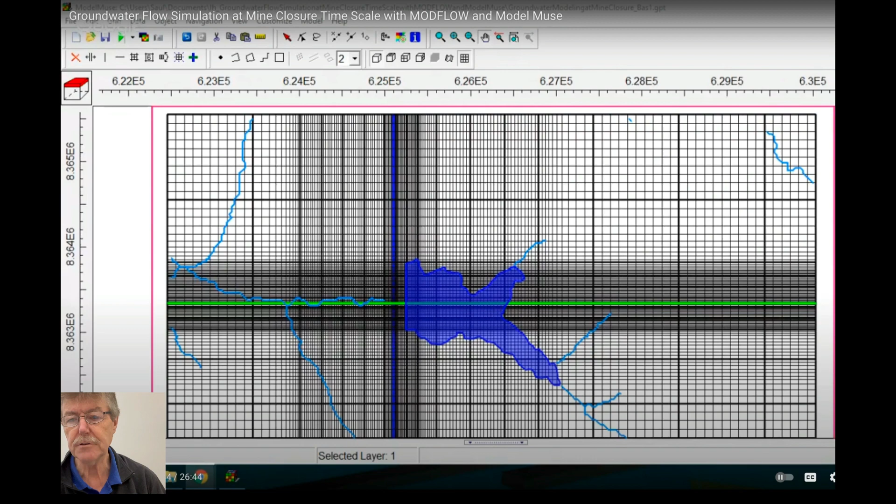Then we can solve them through a little shenanigans that we tried last time, and so maybe we can look at that. So that's where we'll follow on from today. So what we'll do today, if I bring up the things we had - did I open it already? I think I got to where we were. Well, this is what we'll do today.

These are the things we'll chat about - recap first, but then we'll just finish off what we talked about in terms of flow in porous media. We'll see that we can solve lots of porous medium flows and external flows, flows around wings, by using something called stream potentials.

And then we will look at conservation of momentum equations, where our forces are equal to velocity times this equation here, to solve for open flow problems.

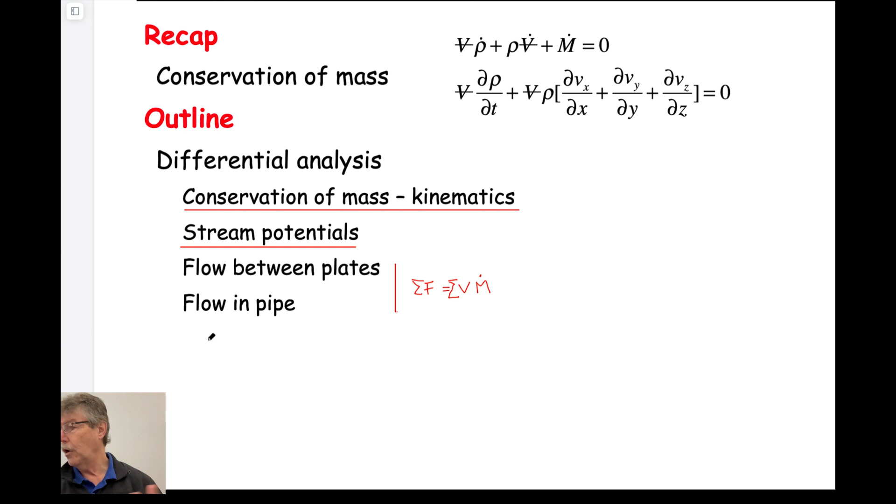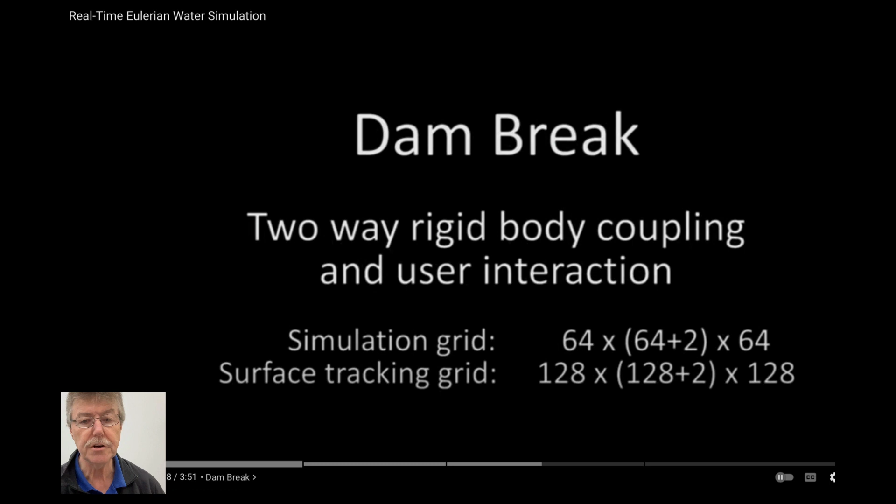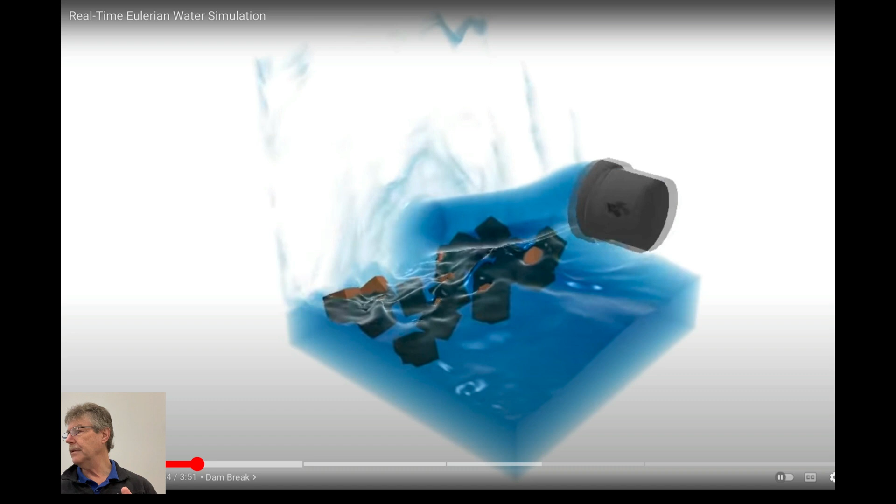We didn't really look at this morning, but we make the distinction between flow within porous media and flows which are actually external. Instead of flowing within porous media, these are free flows - like water sloshing around in a bucket with no porous medium in the interim. For that, we can't use Darcy's law to apply the frictional losses, so you have to do it in a different way. We'll look very briefly at that, just because it's an important thing in solving flows like this, not that we'll talk about actually solving them.

So that's our plan. Let's go back to maybe what we had last time.

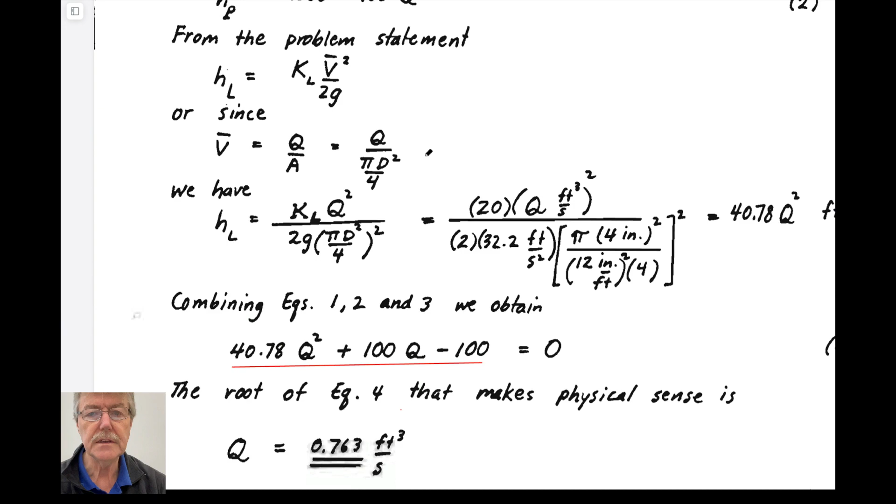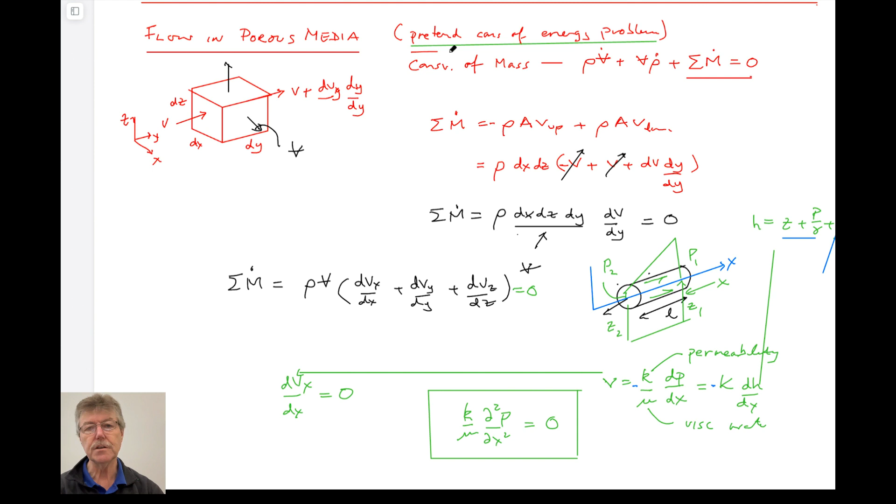This was just to remind you, we talked about this being, as I called it, pretend conservation of energy, because we're really only solving conservation of mass.

We went in and looked at this differential cube - the velocity going in, velocity going out, the fact that it has to change velocity as it goes across it. If we sum those masses in minus masses out, we get that the sum of the masses is equal to density, volume of our little cubic element, times the change in velocity with y as you go across this length. If we resolve in each of the other directions, we end up with 3 derivatives in the component.

If the sum of mass is equal to a steady state problem, then it equals 0 by definition. So what we can do is write the velocity term in terms of Darcy's law, either in terms of a pressure gradient or a head gradient with different terms before it. We throw this into here, and if we do that, we end up with something like this.

The other thing we could do is recognize that for a non-steady problem, this is just equal to volume times the change in density, still equals 0. These are steady state problems - if you look at the flow within the system at a snapshot now and 10 minutes later, the flow velocities in the system don't change. But for non-steady problems, we can accommodate it by looking at this.

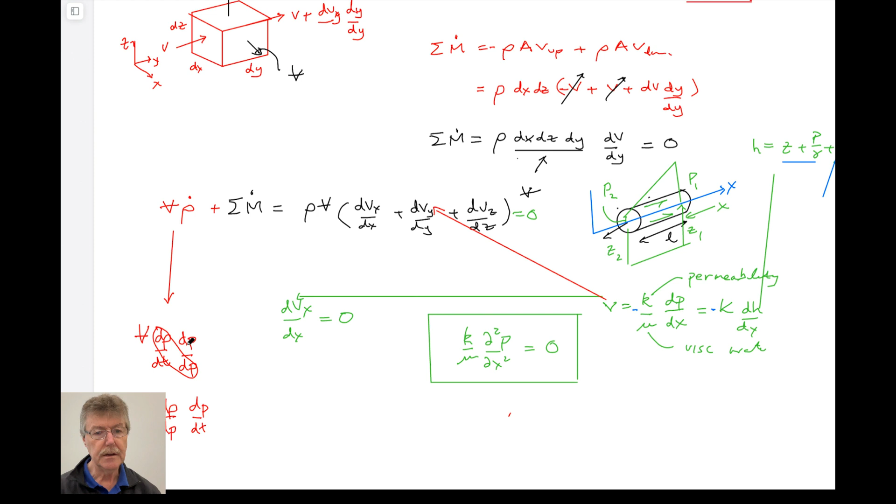If we sort this out into a volume multiplied by d rho dp - my p's and rho's start looking the same. This is a rho, this is a p, this is a dp dt. In other words, I'm pairing these two together and pairing these two together. That's all I'm doing.

And then we can define this. We had the definition of compressibility was equal to 1 over rho, dp d rho. And so we have this term here, and we have this term here.

I guess we could write this out as being change in pressure - it's the opposite, right? So d rho, this is d rho dp. Wrong, bad derivation - by definition, write that out. Think I got it backwards. The units of this are 1 over pressure, so it has to be d rho on the top and dp on the bottom. The densities cancel out, so it's 1 over pressure.

So if we substitute this, we just rearrange, get rid of this, rewrite it in terms of d rho over d pressure - perhaps I put a little cap on the bottom - is equal to compressibility multiplied by initial density, and a minus sign to take care of the right sense.

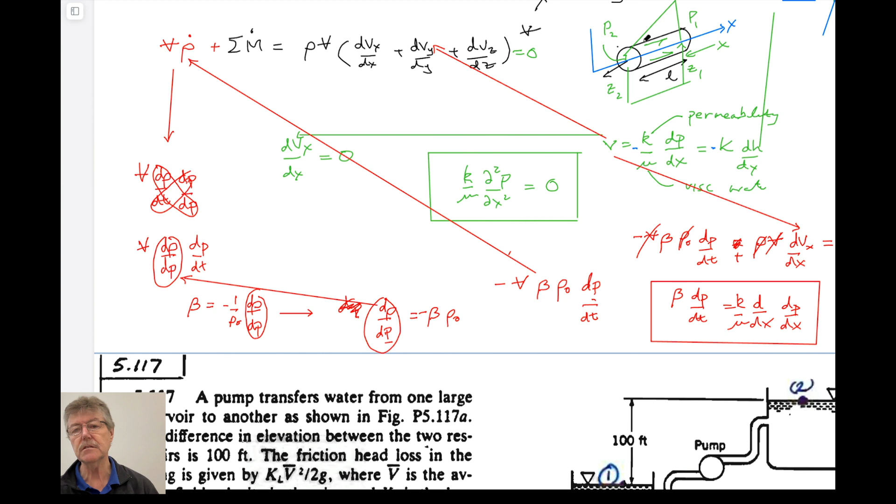So this is the flow equation that defines how a pressure gradient drives flow within a porous medium. It applies the shear resistance to that porous medium, that is the loss as you flow from upstream to downstream, which is the essence of porous media flows. You can imagine that if you're flowing through very small pores within a porous medium, there's lots of drag on the fluid, so there's a big pressure drop. So the essence of this is to be able to do that.

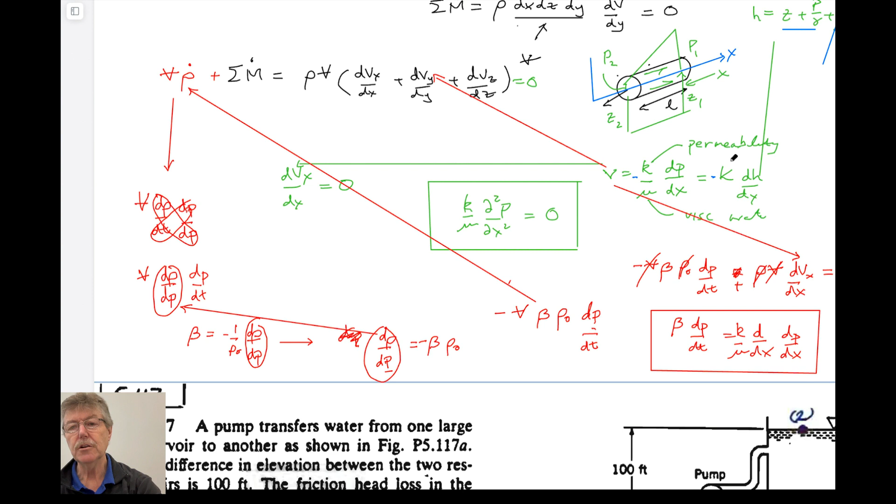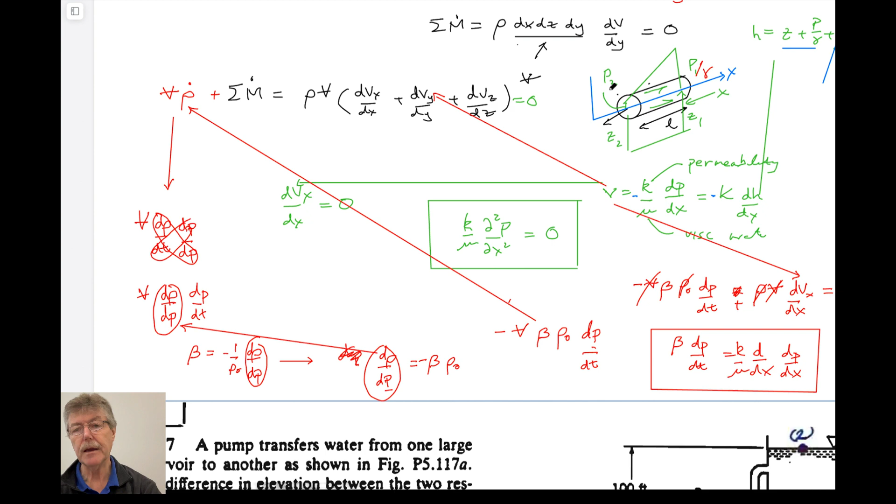And if you deal with this, this is the way it's written in terms of flow, where you define it in terms of pressure. If you define the behavior, as we alluded to last time, you could also represent this as a head, Z1 plus P over gamma W. You could think about P over gamma W as being the height of this. Then you can also write this as a surrogate equation, which looks like this.

So if you're looking at groundwater flow, the equation is often written in terms of a term called specific storage, a change in hydraulic head with time being equal to a hydraulic conductivity multiplied by d2h dx squared.

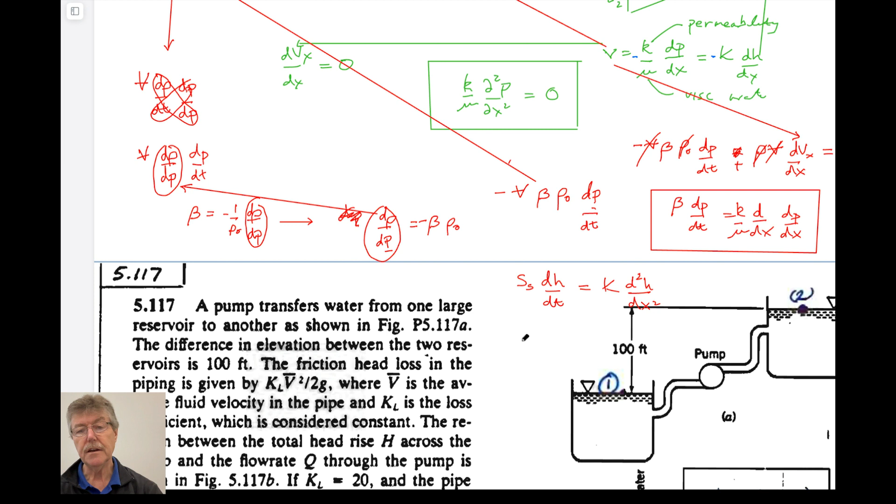And so all we've done is we've replaced the pressure with another term, which is hydraulic head, which is equal to the elevation head plus the pressure head. So it kind of intrinsically includes this. These are different coefficients which are governing the behavior. Perhaps in this class we don't need to worry about what they are.

And so this is the preamble for what we'll talk about today in terms of stream potentials. So we will take this groundwater flow equation. Now that we've derived it in terms of the transient behavior, we'll assume that it's steady state. And if it's steady state, we can write it just in terms of this second order PDE. We'll use that to be able to say something about flow in porous media. So that's kind of finishing off what we said last time.

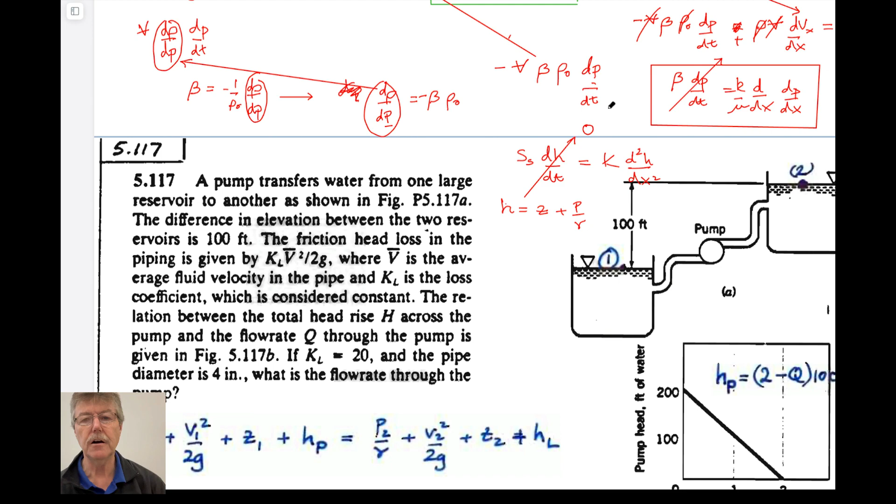I'll rewrite those expressions as we move down here. It's the only important thing that we need to have them. So this is kind of what we did. We took mass in equals mass out. We assumed that the volume of our control volume isn't changing with time. We assumed that the compressibility of the fluid in a standard box is changing with time. And this is what we used.

We basically just now derived this expression. This is what we did on Wednesday, this morning. And the outcomes from this, again, I'll reiterate, we're just using conservation of mass, not conservation of energy or momentum in this, conservation of mass only.

We ended up with two expressions. One was specific storage, rate of change of head with time. You'll see this for the environmental systems engineers who are doing GSci 452 this semester. Hydraulic conductivity, d2h dx squared plus d2h dy squared. So that's an important expression for us today.

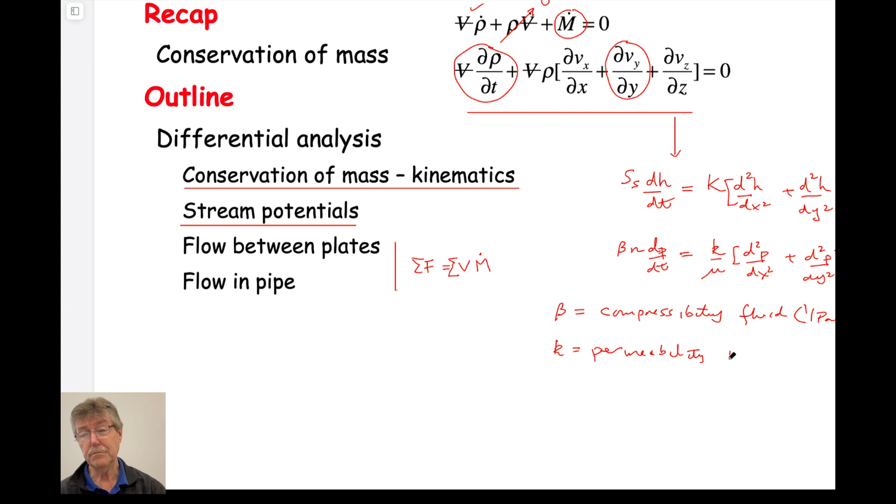So if you want me to define those terms, beta is equal to compressibility of the fluid, remember it's 1 over pascals. K equals permeability, which is in units of meters squared, surprisingly enough, although maybe we'll see why that's the case today. Specific storage is SS. They're in units of 1 over length, I think. They're strange units, so I'm not going to define them.

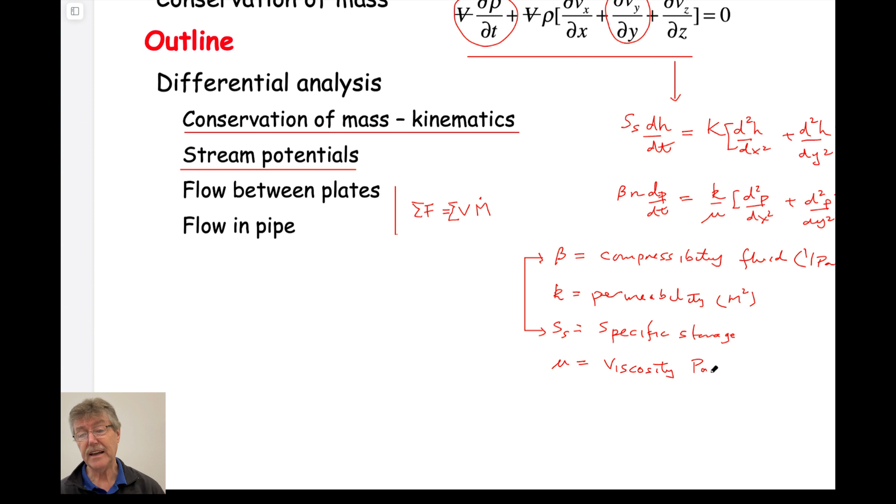And these are the accumulation terms. These would allow fluid to accumulate in a given volume, just like filling up a tire with gas. The volume of the tire doesn't change, but the density of the fluid changes slightly to accommodate the fact that you're pushing it in. Mu equals viscosity, dynamic viscosity, which is in units of Pascal seconds. And water is 10 to the minus 3 Pascal seconds, right? And the other commonality is that P equals pressure.

H equals hydraulic head, which equals elevation head plus pressure head plus velocity head, ignored.

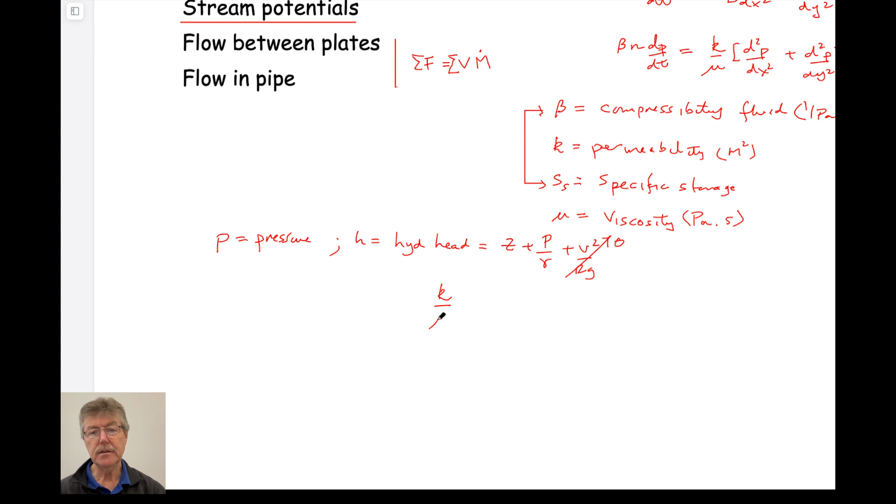The other thing we could relate these two with is a good expression to know: permeability divided by dynamic viscosity is also equal to hydraulic conductivity, density of water, gravity. So I guess I didn't define hydraulic conductivity, which is in units of meters per second, length over time, velocity. So that's kind of background. I feel obliged to define those terms since we use them, but you don't really need to know that today.

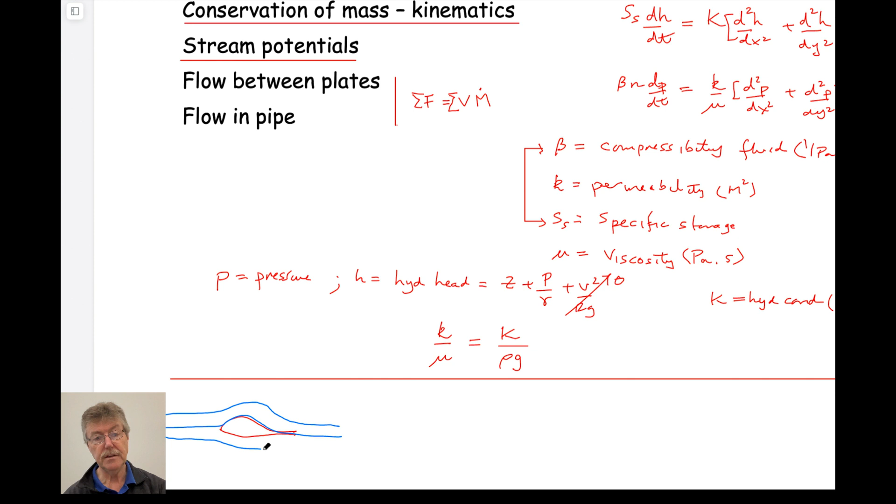What we're going to explore is the fact that if we go back to the wingsuit guy, we can think of him as an airfoil. And we've always messed around with this - I don't know why I did such a small airfoil - the idea that we can think of a stream tube on top of this and a stream tube below this.

Wouldn't be an unreasonable thing to think of. The idea is that the air impacting here has to join up on the trailing edge of the airfoil with the air that was here before. So if it's traveling a longer distance on the top, it has to go faster. If it goes faster, then Bernoulli tells us that elevation head plus pressure head plus velocity head equals a constant. That's why we can draw that diagram with the upstream and downstream portions of our tube.

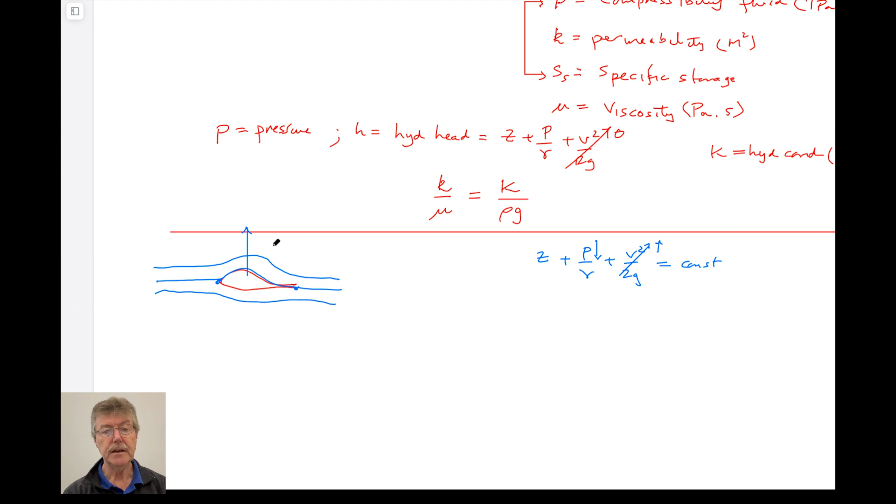Then by definition, going from here to here, the same molecule of air or nitrogen that was split here, half going over the top and half over the bottom - if it's traveling further on the top, it has to go faster. If it's going faster, then this goes up. If this is going up, elevation isn't changing very much, so the pressure has to come down on the top half. If the pressure here is reduced, then by definition there's a net force going up, because there's less pressure on the top than there is on the bottom. That's just the deal. So that's how an airfoil works.

It'd be interesting if we could do something about the flow patterns around this, but we're not going to do that today.

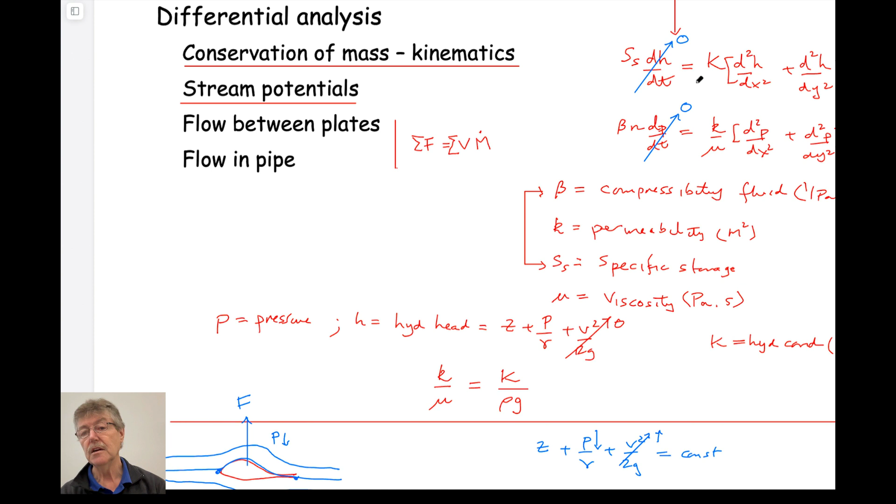It turns out that the equations we're looking at would be something like d2 phi dx squared plus d2 phi dy squared equals 0. In other words, if we make these time-dependent terms go away, even though they might be quite important in some of the things we're trying to do, then both of these equations equal 0. We don't care about the constants ahead of them.

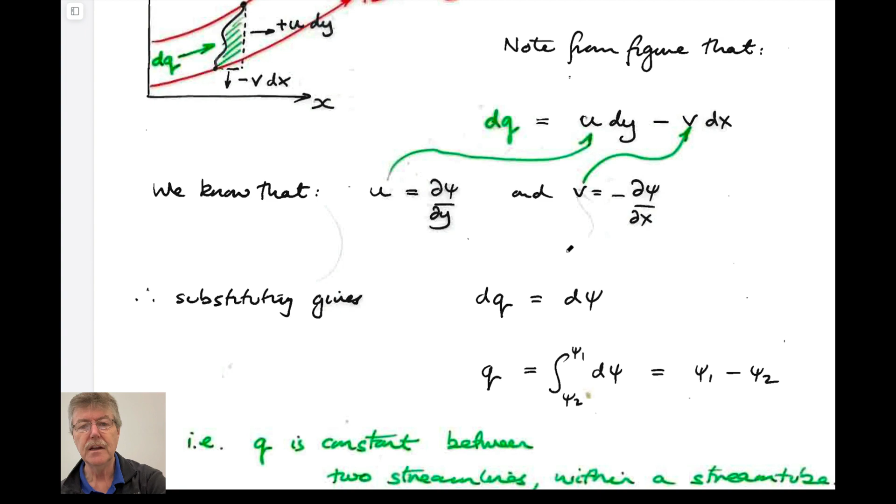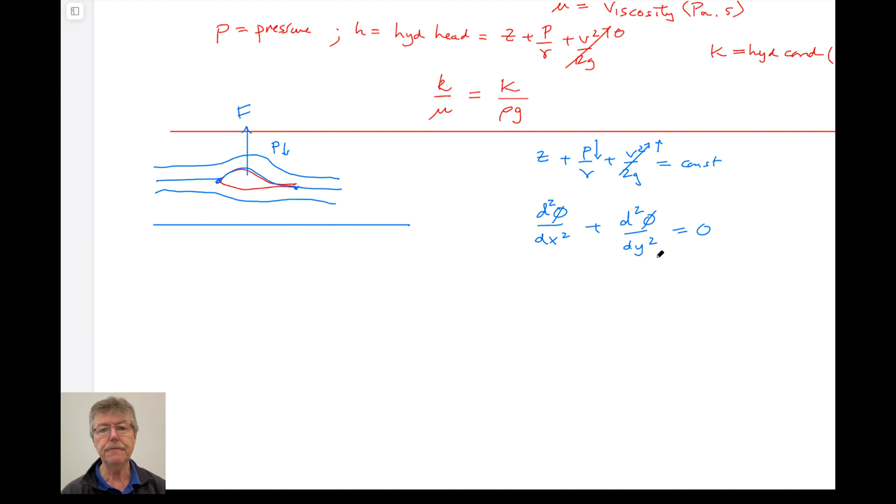So this is generically some term. It turns out that if we look at this - and I won't go through the math, it's kind of irrelevant, it's called stream potentials, actually it's quite short math but I still won't go through it - it allows us to define a bunch of stream tubes or streamlines, which would be the trajectory that an individual particle of water, packet of water, or molecule if you want to think of it that way, takes. But the interesting thing is that orthogonal to these streamlines...

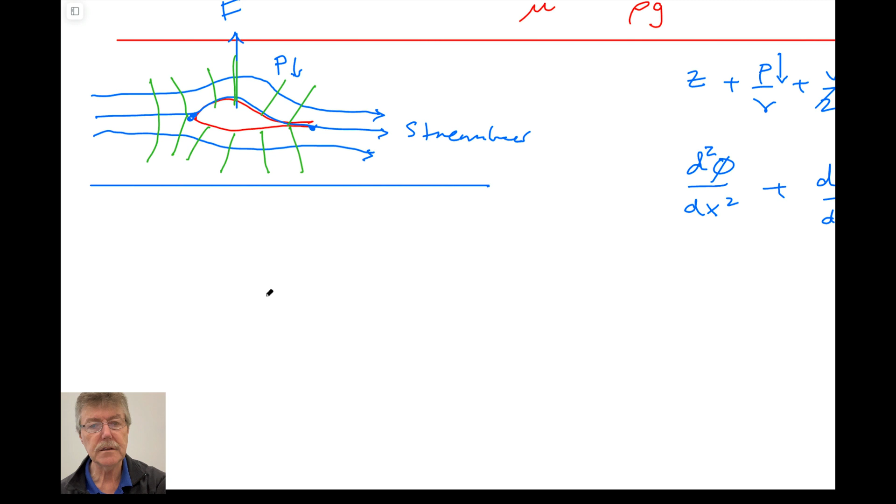We can draw a bunch of what we'll call equipotentials. And the rule for us is that these equipotentials and the streamlines - these are equipotentials, equal potential - that's what this term is here. So we can think of the potential as being the head, which equals the elevation plus the pressure over the unit weight of the fluid, plus the v squared over 2g term, ignored.

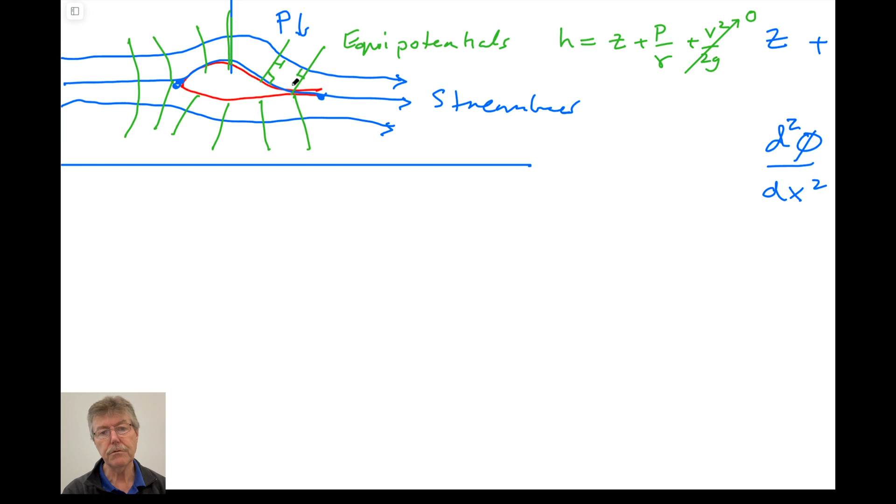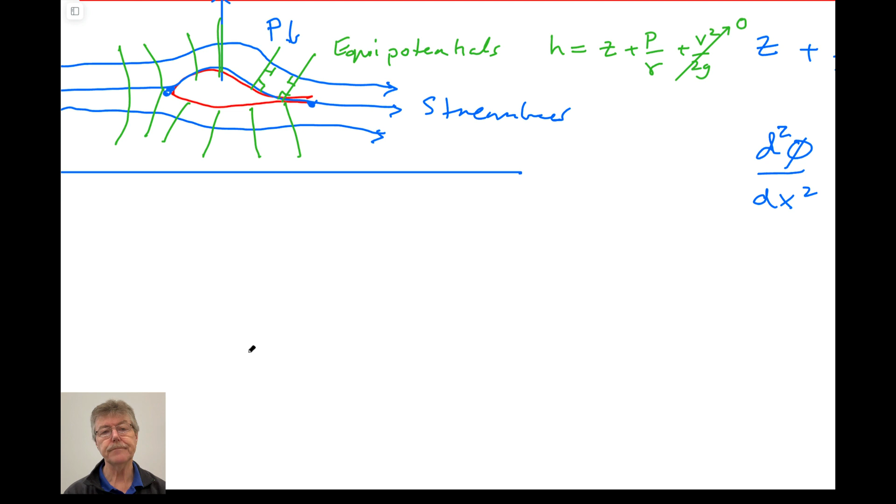So equipotentials mean that everywhere along this line, the value of the head is the same. It's the same on this line as well, but a different value. And the rule is that equipotentials and streamlines have to intersect at 90 degrees to each other. I won't go through the math for it, just a little bit of differential tomfoolery to be able to do that, doesn't matter. It means we can draw nets. So the idea is that we could think of drawing a flow net - that's what we'll talk about.

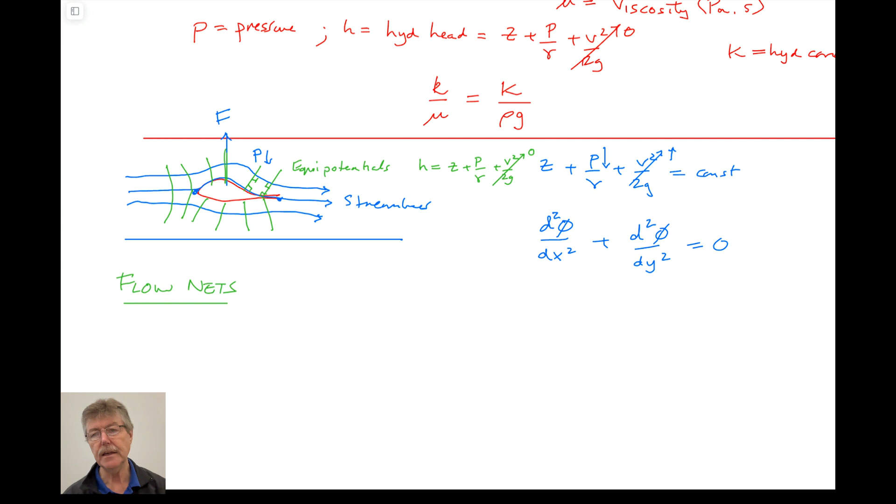Which is a really quite powerful technique. And I'm going to keep with those colors.

So if you think about flowing between two streamlines, being true to our previous color scheme, and drawing across this.

Is that a yawn? Were you up later than me last night?

So, streamline equipotentials, I won't label them. Let's label this length dl, or it could be just L. Let's label this width dw.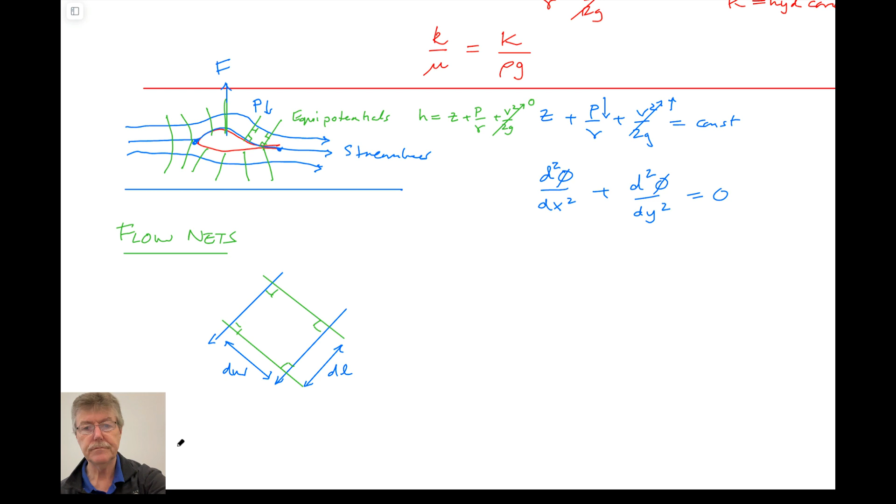What am I going to do now? We'd like to know something about the volumetric flow rate through here, or the velocity. So how do we get that? Q is equal to cross-sectional area times velocity.

Velocity we could write as being equal to hydraulic conductivity times dH over dx, or dl in this case, right? We're flowing from upstream to downstream. We could think of this as being H1 and this as being H2, two different potentials. We know that the flow between these streamlines has to be confined within these streamlines because this is essentially a stream tube. And so we could write that.

We know that the area is equal to dw times the length into the page. So we could write this out, just by doing that substitution, as equal to dw times k times dh over dl.

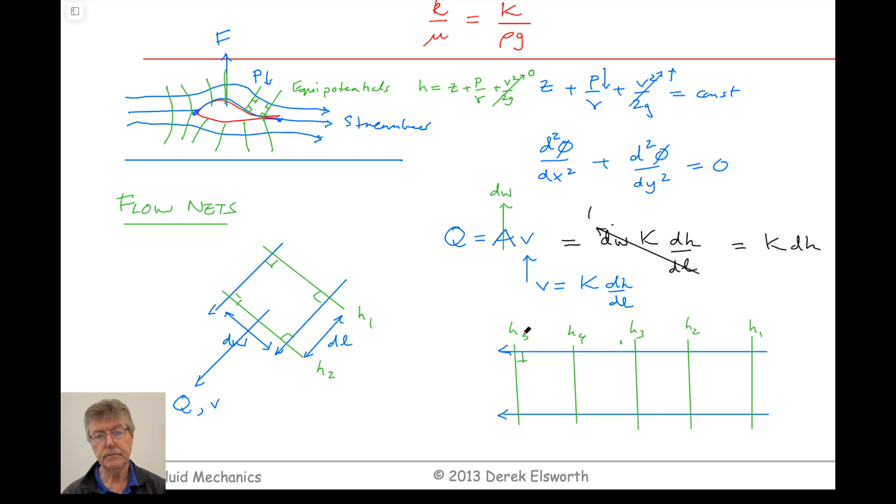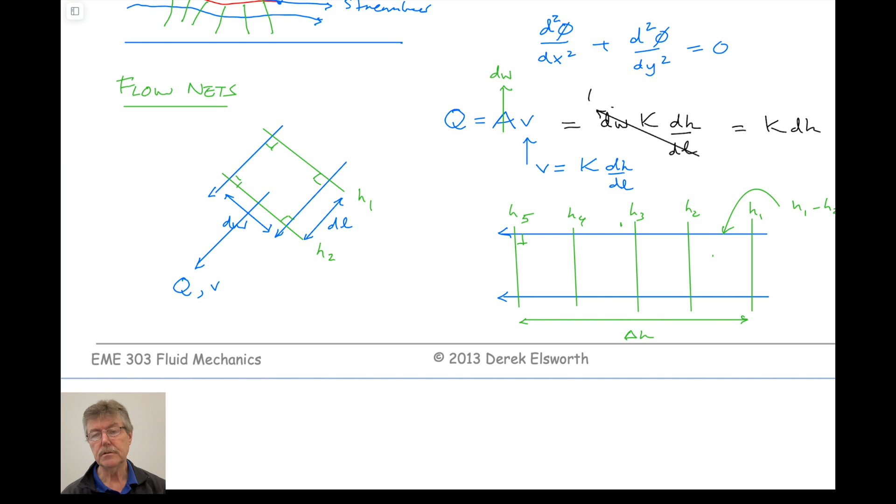We could think of this as being a total change in head as you go from upstream to downstream, which we'll call delta H. And so we could also write that H1 minus H2 is equal to, running out of space, delta H over N sub D.

N sub D is the number of drops, for want of a better word. And number of stream tubes, for want of a better term, is NS.

So taking this term here, volumetric flow rate is equal to K, hydraulic conductivity, times the change in head, which is equal to K times H1 minus H2, which is equal to K times the total head drop across the system divided by the number of drops. So this is the flow in one stream tube.

If we look at the flow in all stream tubes, then Q all equals QS times the number of stream tubes, which equals NS over ND times K times delta H. Incredibly simple formula, but actually very effective. That's it, so we got to where we want to be.

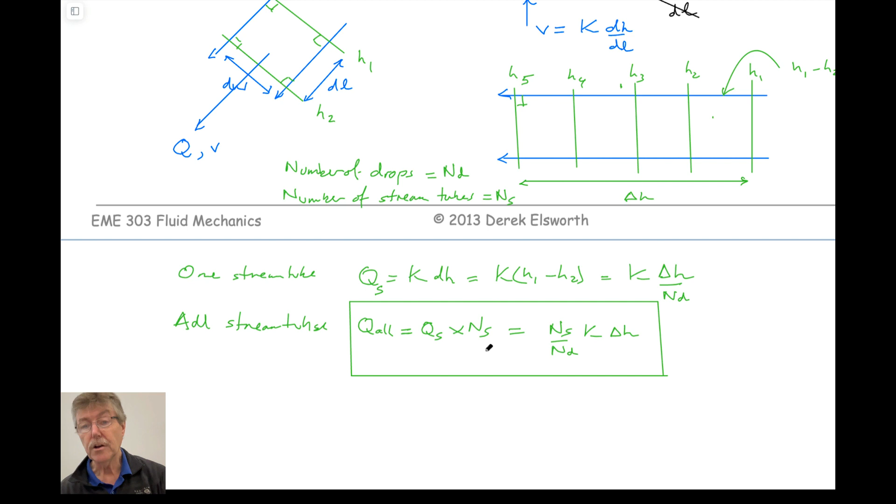So there's an example we can look at. I could draw a flow net here. What we've said is that these cross perpendicular to each other, and if we draw them as distorted squares or square cells, then a couple of the terms cancel out, and this equation becomes the equation that defines flow within the system.

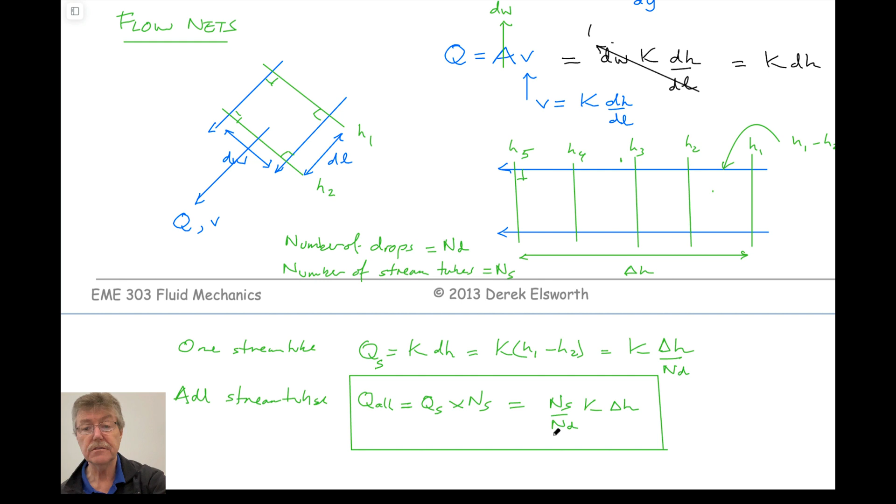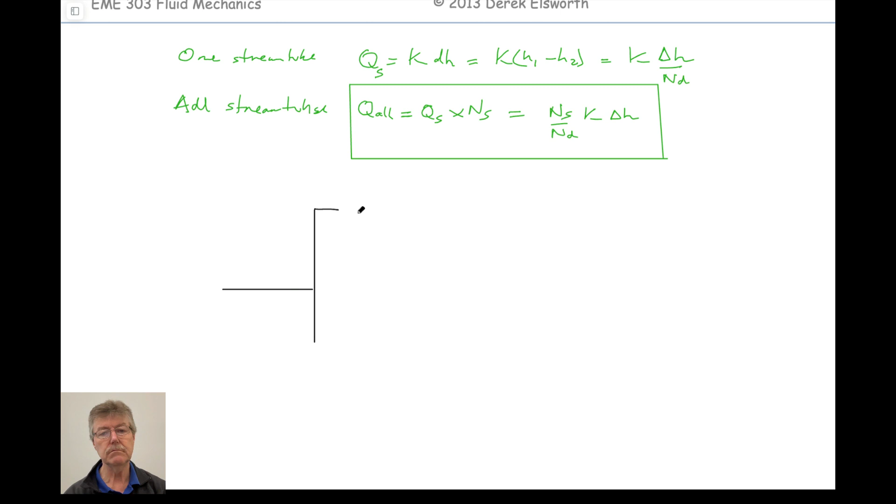So one engineering problem of significance would be, you want to build a building downtown to put your brew pub in. You put a sheet pile wall in, and then you excavate on the other side of it. The sheet pile wall stops the stuff falling in — you must have seen these in town. Also, if the water table is at the surface, it's also to stop the water coming in.

If you get a puddle in the bottom that develops here, then the water table would be here. You'd pump it out, and you'd put the sheet pile wall down deep enough so you didn't get a ton of water coming in. So how do we solve that problem?

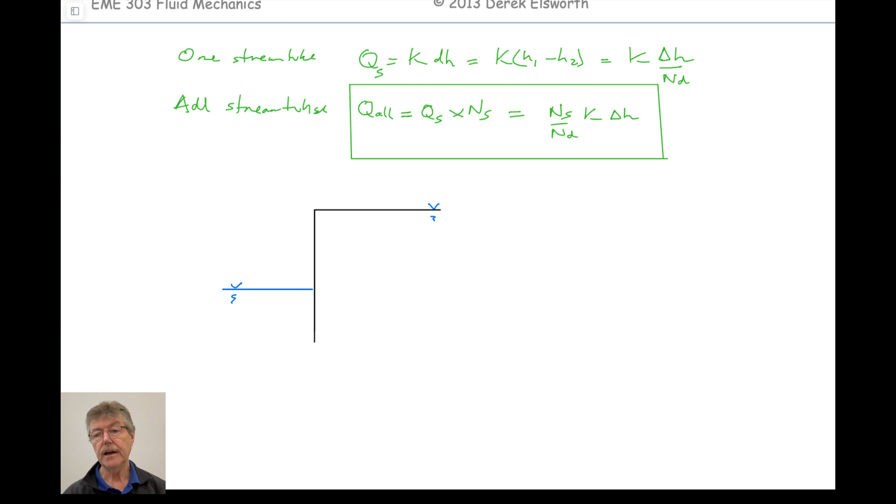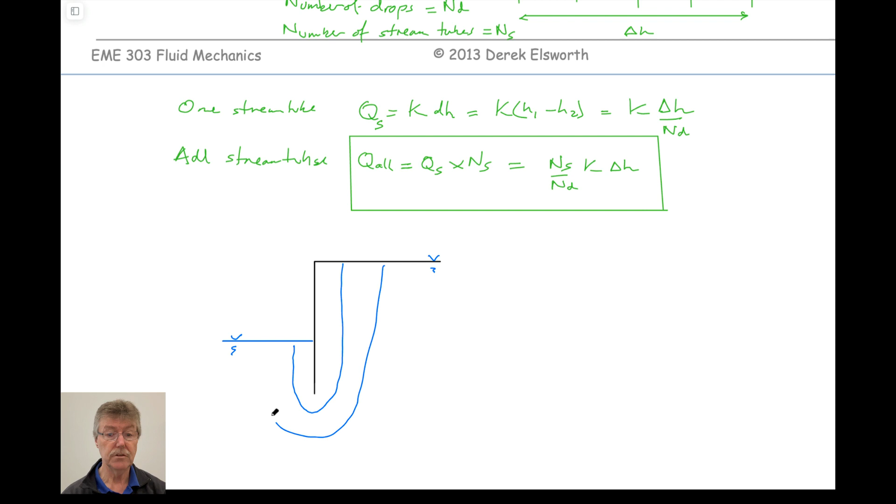What do we have? Blue for streamlines. I don't know how good a job I'll do with this. I'm not very good, but good enough. You see what we're doing — lousy job, you could probably do better.

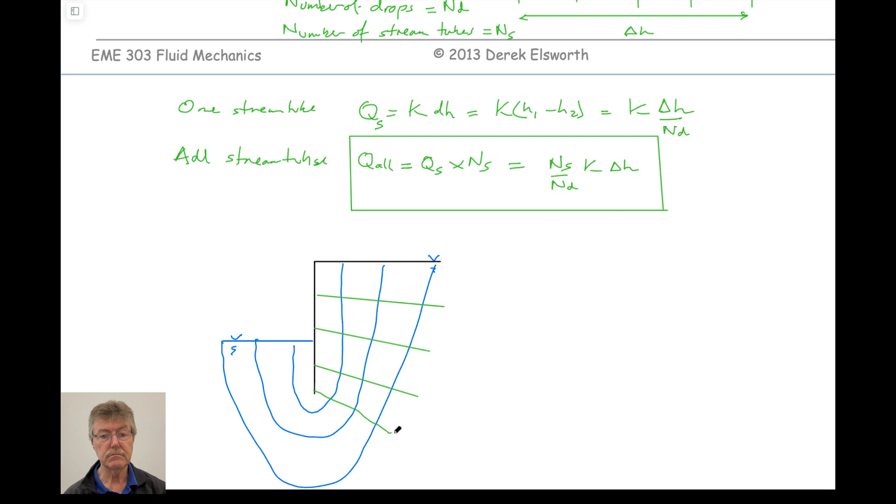So I'm just satisfying the fact that streamlines and equipotentials cross at 90 degrees, giving you boxes which are roughly square. Be a little bit of a strange one here — we're getting kind of triangular in this little zone, but don't worry too much about it.

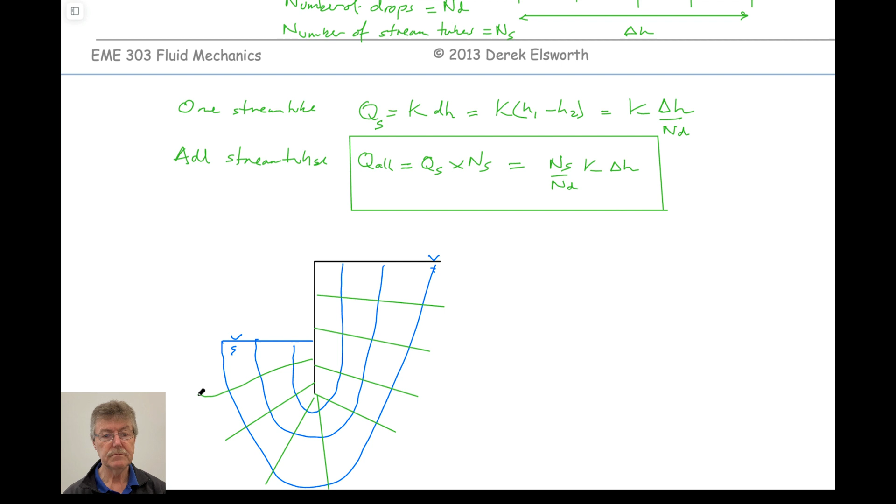Doesn't matter if you get exactly the right geometry as me, because we'll just number these things. What else do we need to know?

Well, here P equals 0, Z equals Z1, V equals 0 for all intents, we don't care about V. Here, P2 equals 0, z equals z2, and again v term doesn't matter. So actually delta H in this will just be equal to H1 minus H2, which equals Z1 plus P1 over gamma minus Z2 plus P2 over gamma.

This is 0. This is 0. So it's just this length. So this is just delta H, physical length.

Number of stream tubes, well if we write NS on the top, would be 1, 2, 3.

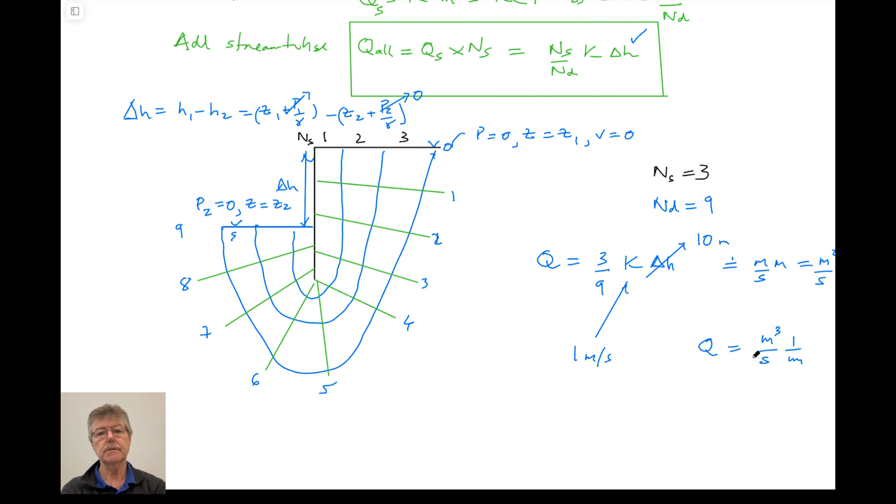It's an incredibly simple way of doing things. So it turns out that you can also use the same technique for flow around airfoils. It doesn't have to be flow in porous media. It works quite well, even though we know that the velocity squared term might not be small here, but maybe the velocity squared term isn't changing very much.

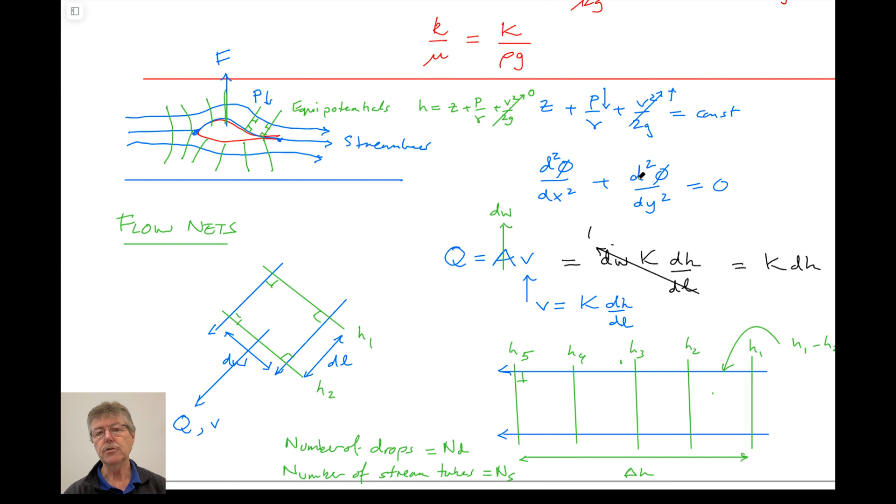If this stream tube isn't really constricting, then the velocity as you go from upstream to downstream, from continuity, we know it's equal to V1A1 upstream, V2A2 downstream is our continuity equation. So if the width of this stream tube isn't changing, then the velocity isn't changing very much along here. And so the only thing that makes this term important is inertia. You're accelerating a fluid as you squeeze it through a smaller part of the stream tube, and you can't assume that this term goes away. So it works well for airfoils as well.

And so there's another example in here, I guess. I don't know, we could do it again. Maybe it's a bit more complicated than the previous one, but you see it has exactly the same attributes. Width and length are the same. Flow quantity is defined the same. We can calculate the flow rate through the system.

Is equal to number of stream tubes over number of drops times hydraulic conductivity times delta H. And here we can also prescribe. It seems a bit stranger that this is an equipotential. This is an equipotential here. Why is it an equipotential?

Well, if you think about this being open and a swimming pool on the inside, then the pressure change in here would be equal to this. So this would be P over gamma. And the other part, going vertically upwards, would be equal to Z. Or here is Z.

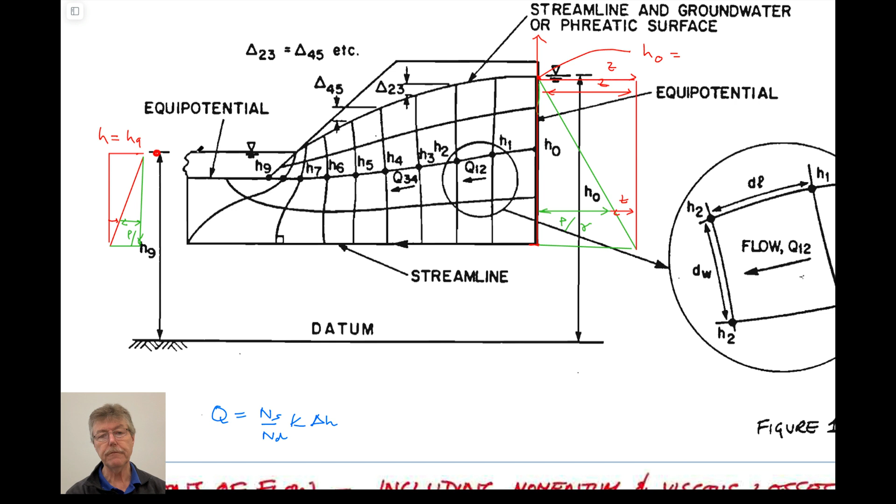And so this would be the pressure downstream, and this would be the elevation. It turns out all you need to know is the head at this point, which is equal to h9, a length. The head at this other point is equal to h0, this length here. The difference between those is just the physical height between the water table here and the top of this free surface here - the top of the swimming pool, not the magnitude of this point, because it's only the top of the swimming pool downstream that equals zero pressure.

And then if you want to use this equation, this term here would be h9 minus h0, which is really just this, as you can see.

This is a bit more complicated because this is a free surface - that's why I didn't do the example first. What do we know about a free surface? It's the top of where the water exists. By definition, the air pressure here is atmospheric, the definition of a water table. And so for every single drop here, this has to be the same change in elevation as you go down step by step. Too complicated for us, but just take that on trust.

The rest of this equation, well, we know this is equal to some number - could be 1 meter a second, could be anything, a bit high for permeability or conductivity. What are the other terms here? Number of stream tubes: 1, 2, 3, 4. Number of drops: 0, 1, 2... it's 9, right? 1 through 9.

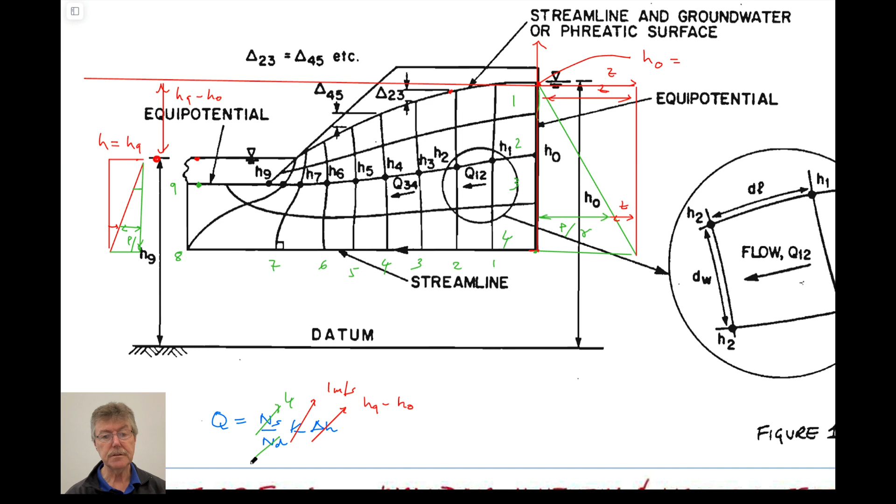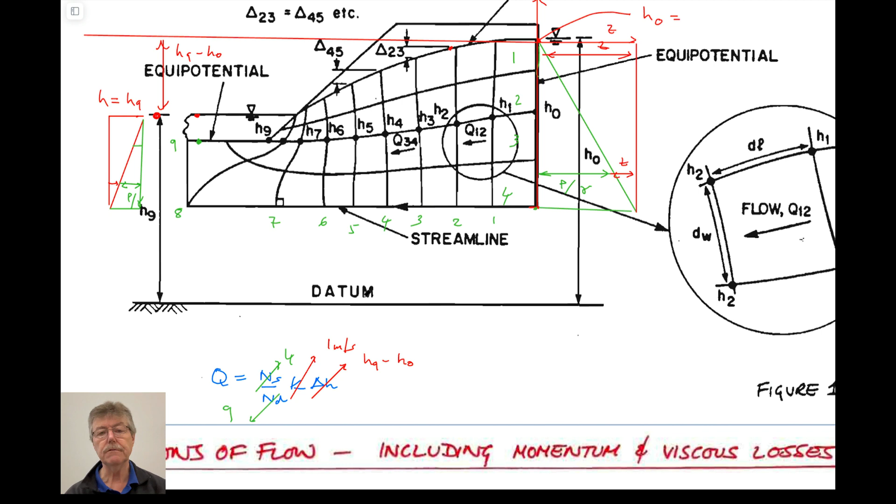So, pretty cool - any geometry you can draw the right flow geometry for, you can get the solution for. If you're looking at flow into a well, in plan view, you can imagine flow would be flowing along the slice of a cake. You could do the same thing: equipotential 2, 3, 4, 5, with an outer boundary here. So these are kind of squares - you can do the same thing.

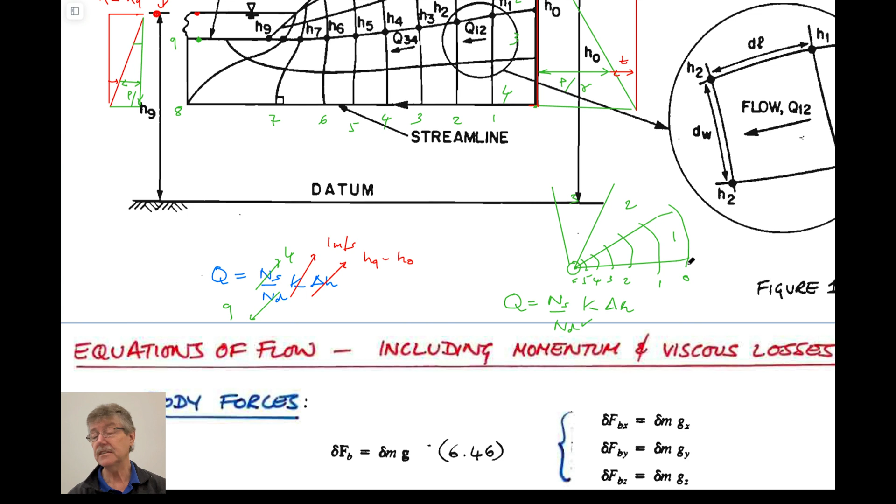So flow into this well would just be equal to number of stream tubes, number of drops, K delta H. If you know the difference in head between this point and this point, and you know the number of drops - 0, 1, 2, 3, 4, 5, maybe 6 - you've got this. If you know the number of stream tubes, well, this is the stream tube going into one segment, but you also have one here, and one here. So this would be stream tube 1, this would be 2, this would be 3 - you'd probably have 10 of them to be able to do that. So you could get exactly the flow into a well, steady state, for that.

So I've said too much about that already. Okay.

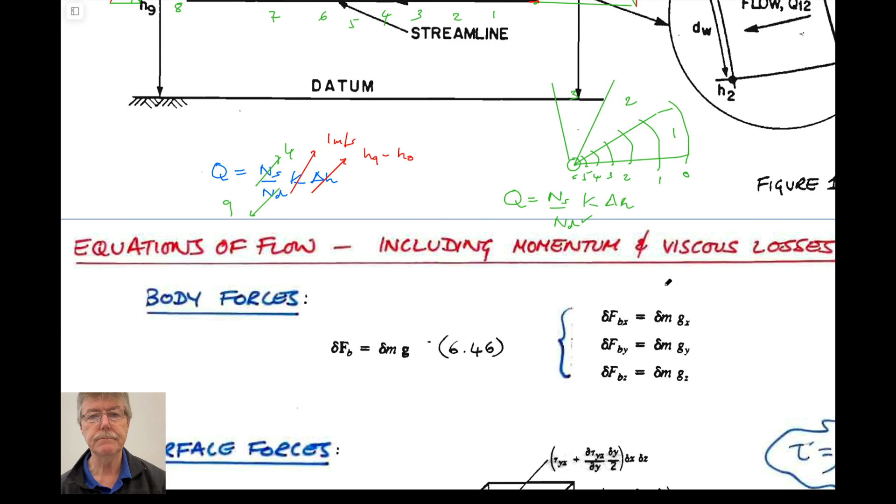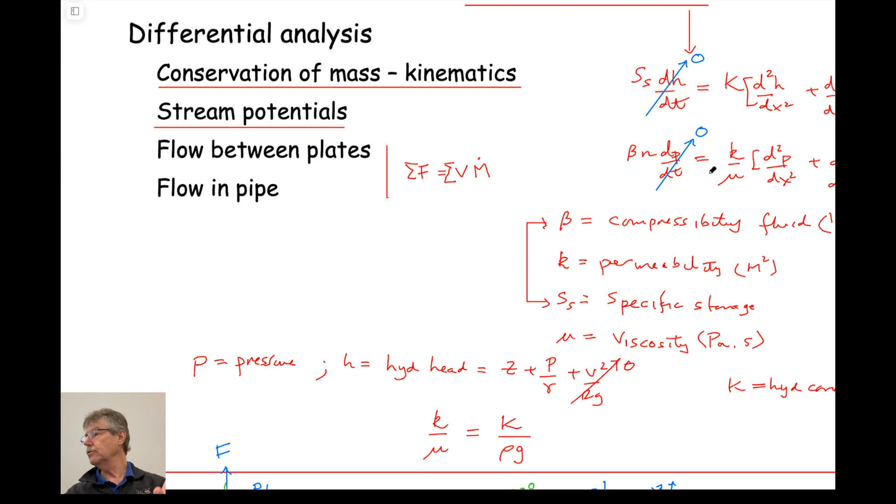So just to close things off - we've made a big picture point that for these flows, remember we've used only conservation of mass and something that represents the frictional losses, which we've called either the hydraulic conductivity or the permeability. If we want to represent those flows out of the fire hose we looked at, and the dam break flows, we have to do something a bit more complicated. For that, we use what's called the Navier-Stokes equations - if you like, the real energy equation.

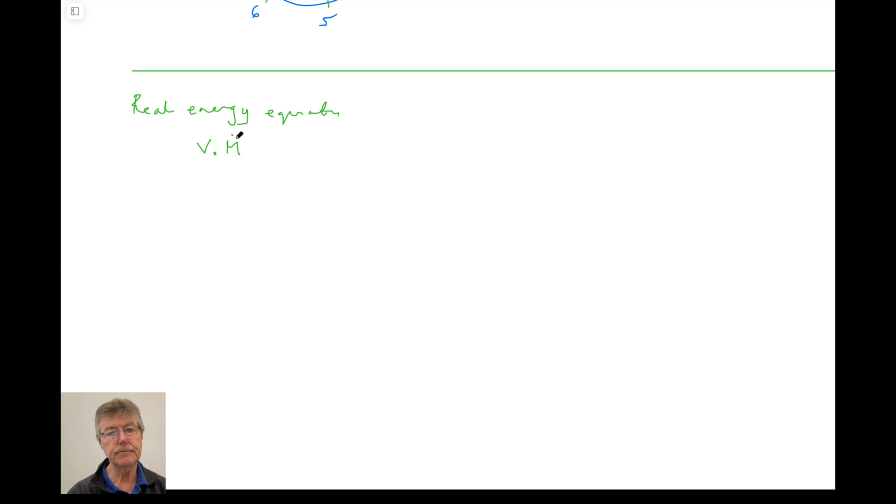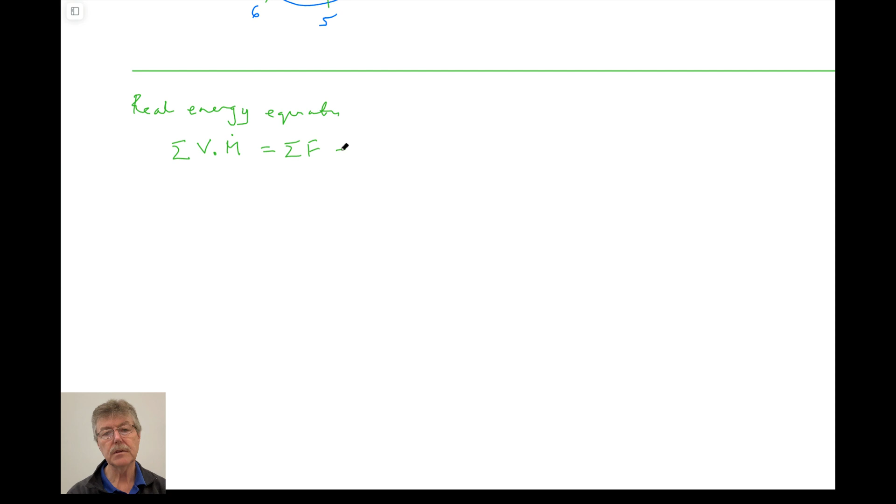And you could think about that as being velocity times mass flow rate equals the sum of forces. Remember this? This is our conservation of momentum equation, plus head losses. This is conservation of momentum. This is conservation of energy, because it includes the fact that we're not a perfect system - we're losing energy in the system. So this is the energy equation.

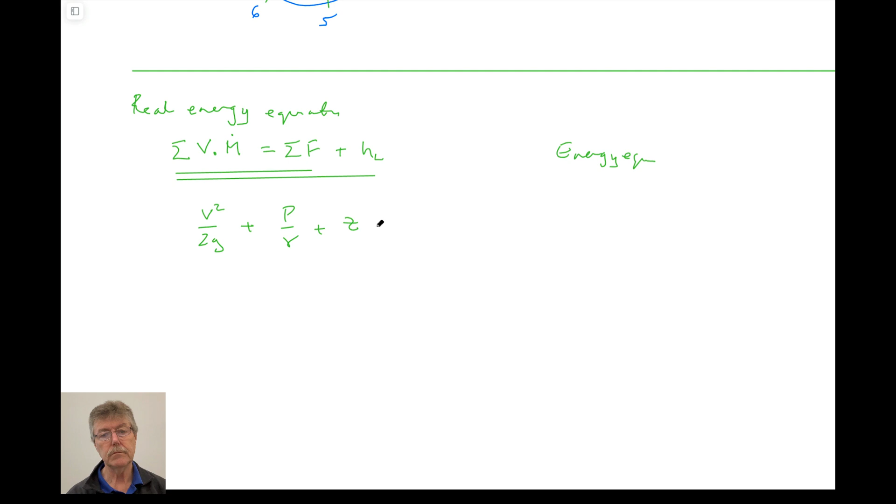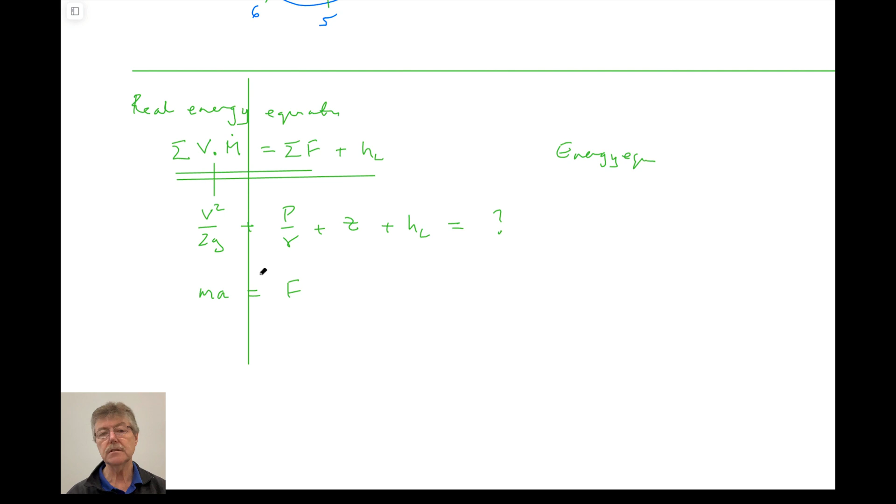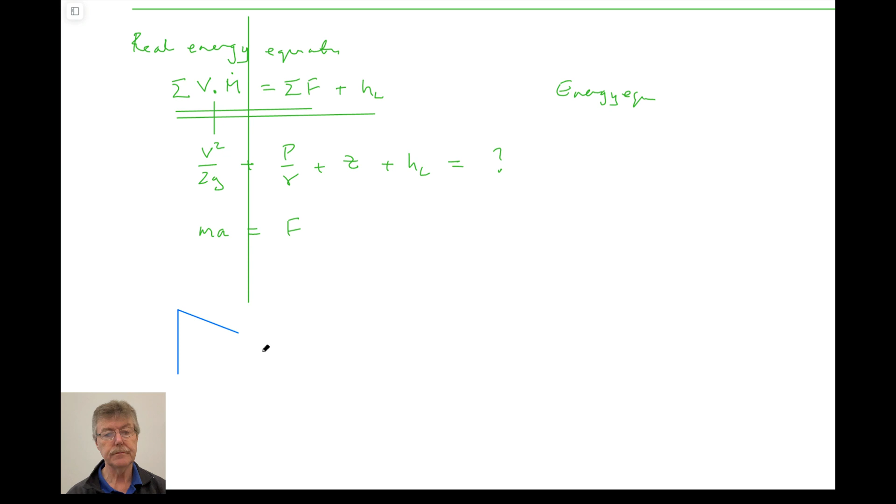So what we could do, although we won't do it, is make a little cube and look at velocities flowing into that cube - we looked at that before. We can look at velocities flowing into the cube, velocities flowing out, v plus dv, v. We could account for this equation here, and we'd end up with a very complicated set of equations. Remember that there are three of these.

So we'd have a value of a velocity in the y direction, a velocity in the x direction, and a velocity in the z direction. So we'd have 3 terms, 3 equations, 3 velocities. So we'd be able to solve it if we had these 3 equations.

But we also have a fluid pressure acting here, which is an unknown. So if we want to solve this open flow system, we have to have another equation to constrain this. And actually, just like Bernoulli, we have to use continuity: V1 A1 equals V2 A2, which is just conservation of mass. So this is one extra equation, which allows us to solve for P.

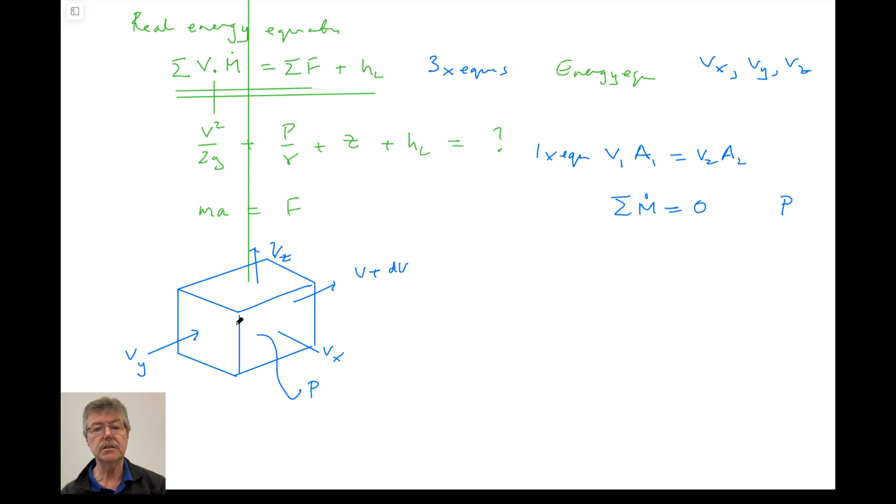Not examinable stuff, but just big picture stuff. We could solve for the real losses in the system, where this little cube isn't filled with porous media, in which case we can't use Darcy's law. And if we do that, we end up with a complicated set of equations, the so-called Navier-Stokes equations, which have all the terms we've talked about.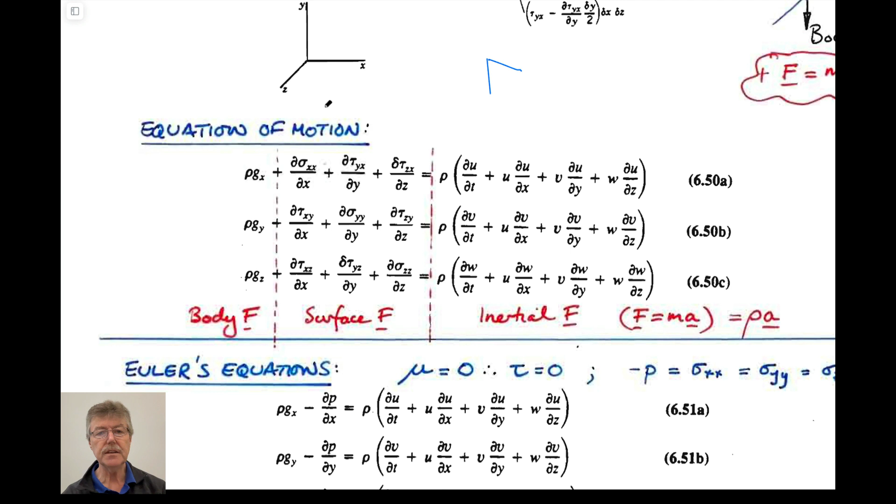So what do we see here? This is a velocity. In these derivations, they've used velocities in the x direction as u, which we've called vx, in the y direction as v, which we've called vy, and in the z direction as w, which we've called vz. And so this is a velocity times a velocity — this is v squared over 2g, all these terms.

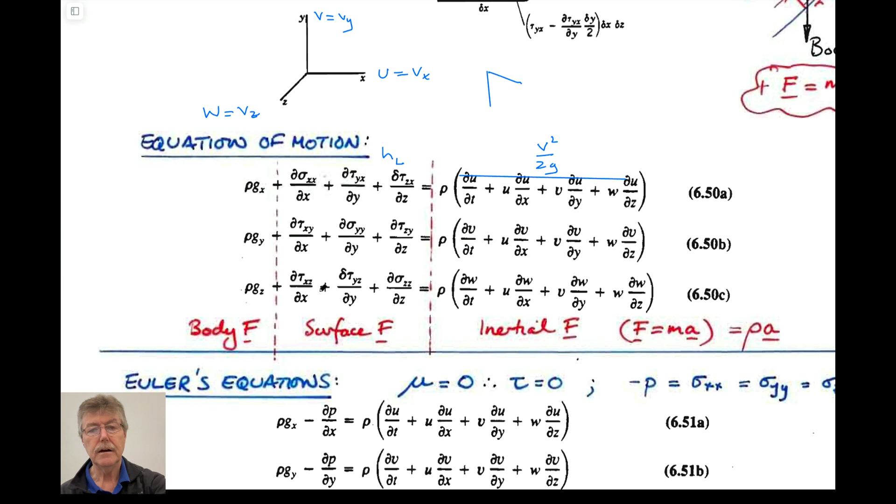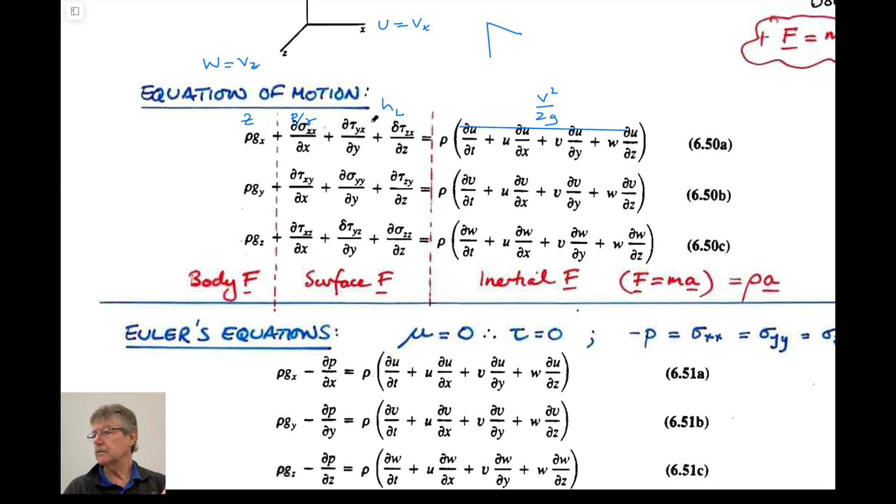So these terms embody all the things we talked about. F equals ma would be mass times acceleration. And these are all forces that are either due to gravity, an elevation with potential energy, a pressure driving flow from upstream to downstream, or a loss that's scalping energy from our system as we go downstream.

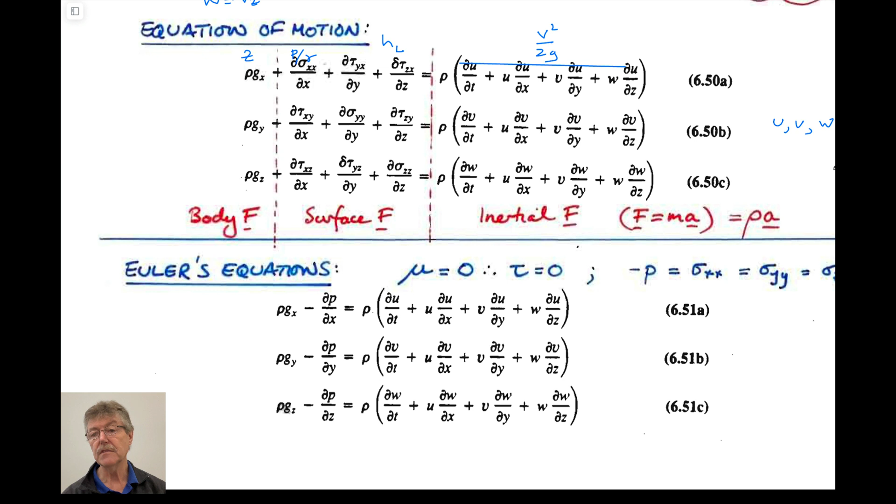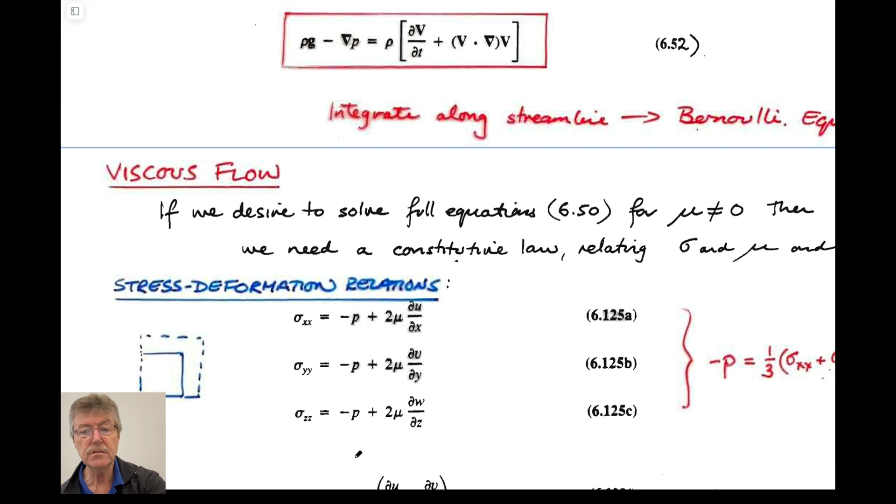And so with these three equations, we have velocities u, v, and w, but only three equations. We also have a pressure term, so we need some other expression to close it. That expression will be continuity — I haven't written continuity here, but actually this is a much better way to see it. This is continuity: mass in equals mass out. So for us, this would be sum of masses equals 0.

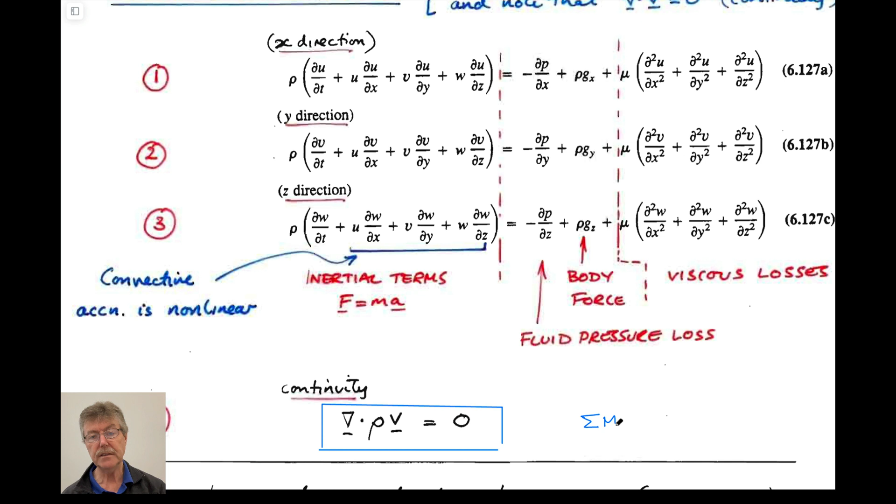And these expressions, you can see it much better here. These expressions up here would be: sum of velocity times mass flow rates equals sum of forces plus head loss, which is the same as Bernoulli. This is a viscosity times a velocity, so this is the head loss. This is density times gravity, so this is an elevation head. This is a pressure change, so this is P over gamma. And this whole term here is accelerations, which is v squared over 2g, the same as this inertial force.

Well, actually, no — this inertial force here. So, I know you're packing up. And so the only useful thing about this is that we can get a couple of standard solutions.

So if we use these 4 equations, we can get 2 standard solutions of use to us. One would be parallel flow between parallel-sided walls of a duct, which actually looks a bit like flow within a fracture in the ground. If you're driving down 322, you'll see lots of cracks in the rocks. Looking at flow down cracks in a rock, you can characterize it so that the permeability of that is equal to the aperture between that fracture cubed over 12 times the spacing between it, as it turns out. It's kind of a standard result.

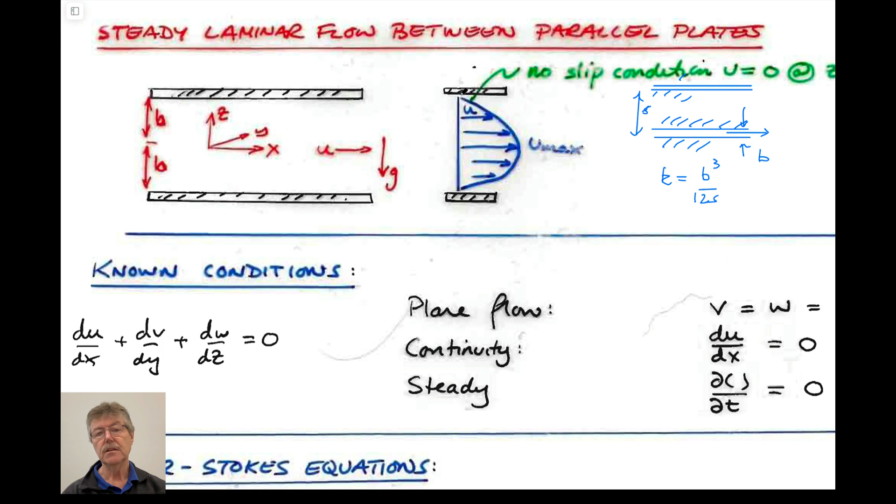So if you have a fracture next to another fracture, spaced some distance s apart, and the apertures are b, then you can get the permeability very simply from this expression. A standard result says the fastest velocity is in the middle of the duct — the flow on the edges is 0 because it's attached to the duct itself. A second standard solution is for flow in a pipe, which again has the fluid anchored at the side, maximum velocity in the middle, and you could convert that to an average velocity that would look like this.

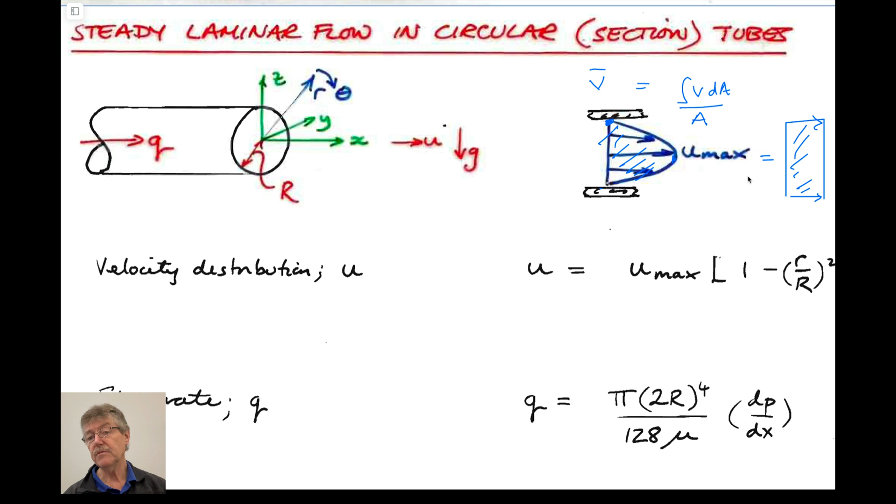So the area in this blue region here would be exactly the same as this area here, because velocity times area integrated over this full section, divided by the total cross-sectional area, is just the definition of an average. In other words, you integrate the velocity over the area, then divide by the area. That gives you an average velocity, which would be this length here.

And you can use that as a standard result, for instance, to find the magnitude of a pretend porous medium. I know we're going a bit over time, but let me give you this since we won't meet next week - we're online.

Imagine taking a porous medium and making it out of a bunch of these tubes where you go from upstream pressure to downstream pressure, like this.

You can write Darcy's law as being equal to K over mu, dp dx, with a minus sign in it. And you can get an expression for permeability, by using these little tubes to look at the flow through it, which equals porosity times the diameter of these pipes squared over 32 or 96. Porosity is just equal to the volume of the void space divided by the total volume, so the total volume would be the VT of this cube, and the volume of the void space would be the sum of all these little capillaries.

You can get the permeability out of it by accounting for the fact that this free flow has a shear stress on the side - that's why there's a pressure loss as you go from upstream to downstream. You can use this open channel flow to do that. That's it - not examinable, but we kind of covered it.

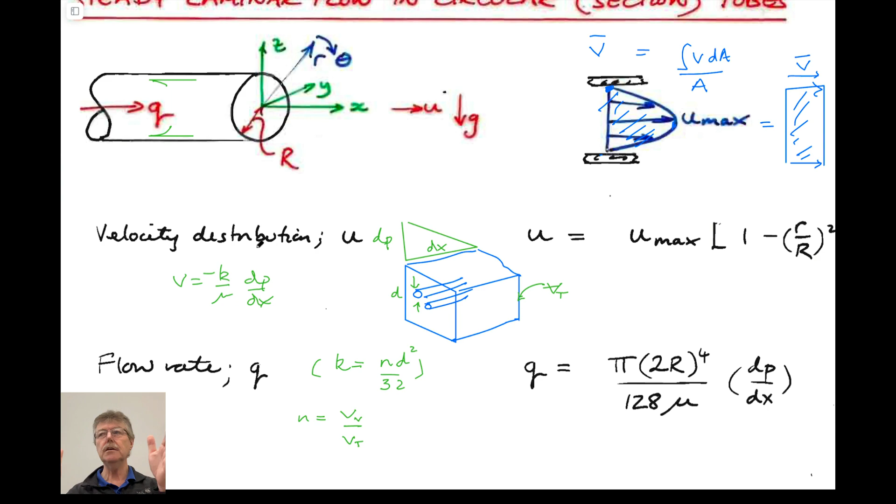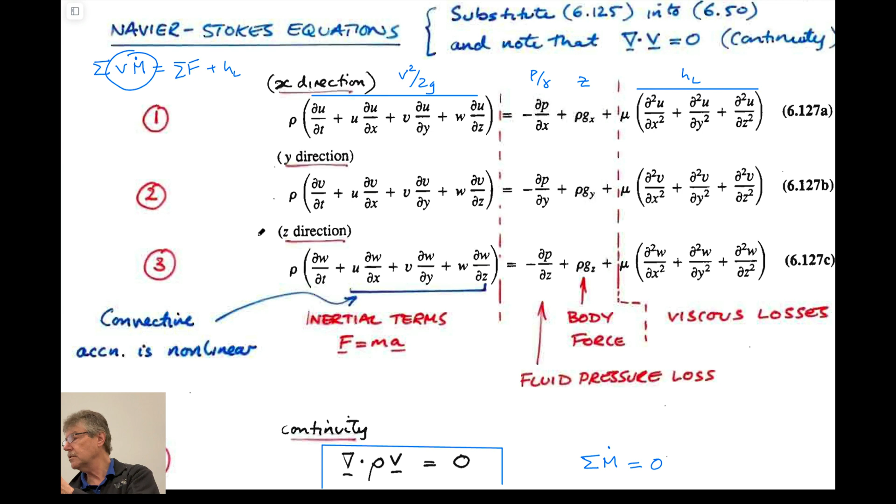So pretend energy loss through Darcy's law, even though we're only solving for continuity - mass flow rates in, mass flow rates out - and real losses in the system using what we call the Navier-Stokes equations, which look very complicated, but it's really just the one-dimensional energy equation, which is Bernoulli plus a head loss, with a pressure head for the pump head.

And if we use those Navier-Stokes equations to solve the free flow problem, we get some complicated solutions which give a maximum velocity in the middle, and some standard results allow us to say something about creeping flows that we can then apply in the subsurface. That's it - big picture.

Next week we're online. We'll talk about dimensional analysis, which is kind of a strange name because it's actually dimensionless analysis - we work with dimensionless variables. The second time we met, we talked about Reynolds number, Euler's number, and Froude number, and that we could get those from the Bernoulli equation.

So we will talk about dimensional analysis, which is just a fancy name for being able to take the variables that control flow in your system, and group them in combinations so you get non-dimensional groupings of those variables, which have zero dimensions in mass, length, and time - kilograms, meters, and seconds. If you provide those groupings, you can figure out a minimum number of experiments to do, so you don't have to do every experiment in the world to characterize the behavior of a system.

You don't need to know what the continuity or energy equations are and solve them - you can just use some clever experiments to apply. You can apply it in fluid mechanics, or in any branch of engineering. It's a very common method.

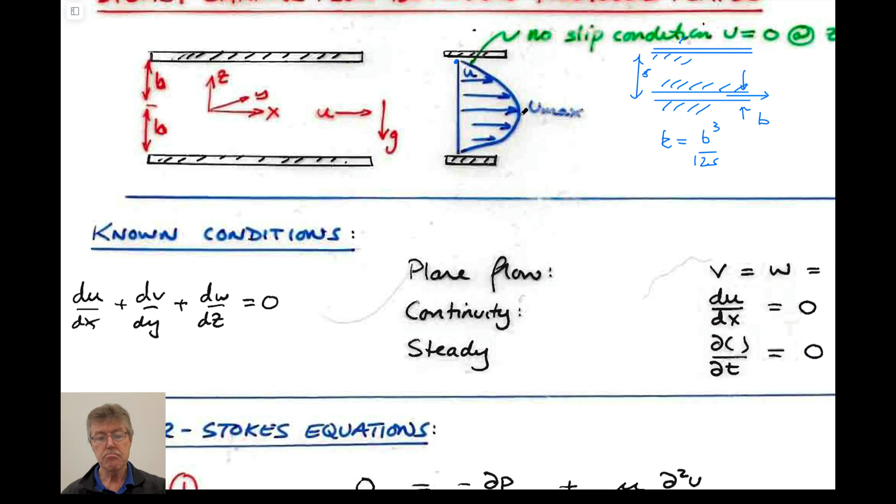When we were doing the stream tubes and the equipotential lines, what determines how many stream tubes and equipotential lines you draw? It's defined by the fact that they have to be perpendicular to each other. So that's a good question.